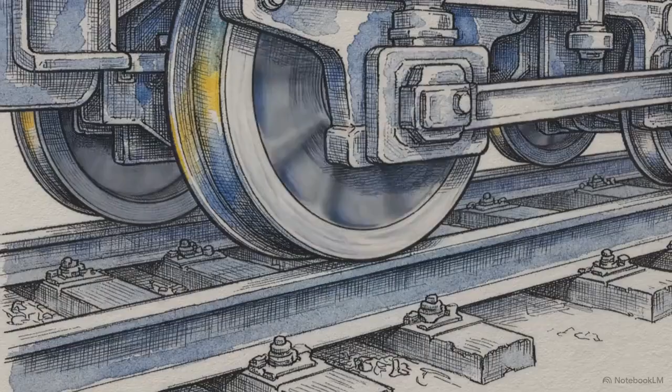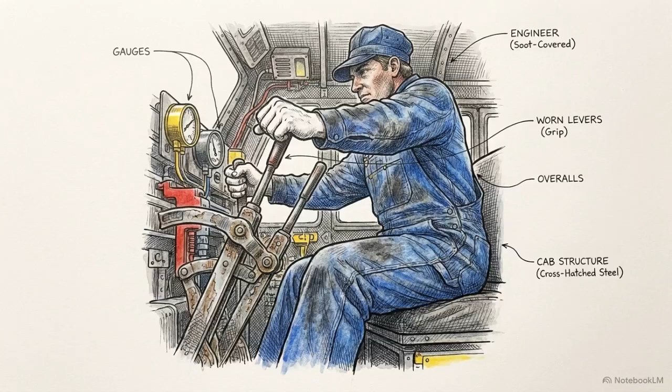Hauling a freight train weighing thousands of tons from a dead stop is a brutal exercise in physics. Under immense strain, steel wheels naturally want to break traction, spin out, and grind against the rails, wasting massive amounts of kinetic energy. For decades, engineers relied on raw weight and manual operator skill to manage this struggle.

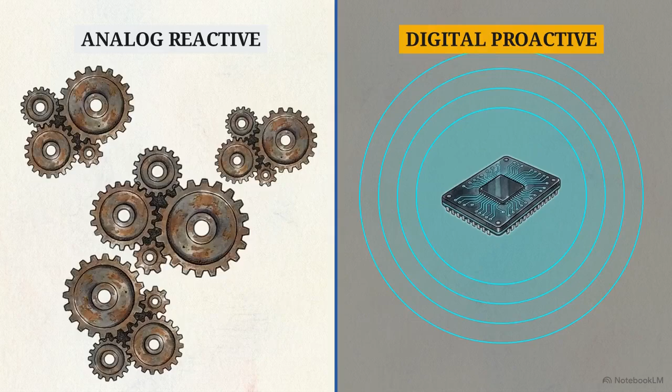Three-phase electric locomotives discard that approach entirely. They solve the physics problem of heavy hauling by replacing analog, mechanical reactions with real-time microprocessor control. We can see this exact engineering directive laid out in the official electrical locomotive manual. Under Section 2.1, Point 1 establishes the baseline for the entire machine.

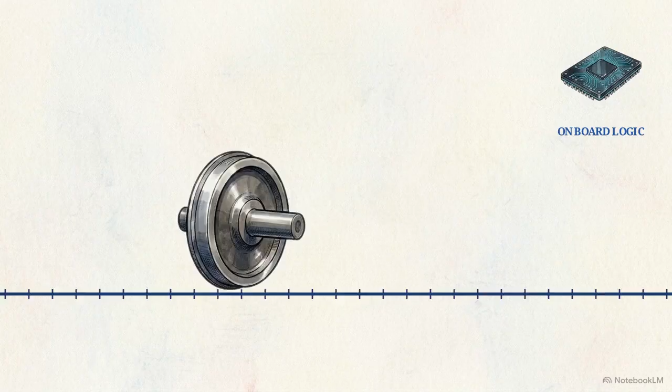Digital electronics now provide real-time traction control. In practical terms, this means the locomotive's onboard computers calculate the precise amount of grip available on the rails and adjust the power output to the wheels instantaneously. This happens entirely independent of the human pilot pushing the throttle.

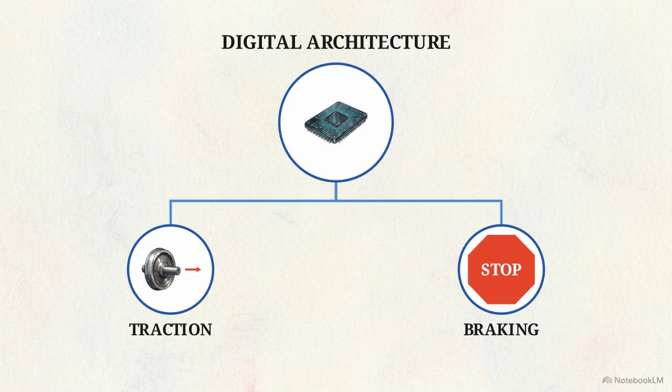This digital architecture requires three operational pillars to function: intelligent traction to generate movement, electronic braking to arrest it, and dynamic auxiliaries to keep the systems alive. Of these three, intelligent traction is the most critical. It is the primary method for ensuring that thousands of volts of electrical power actually translate into forward physical movement without failure.

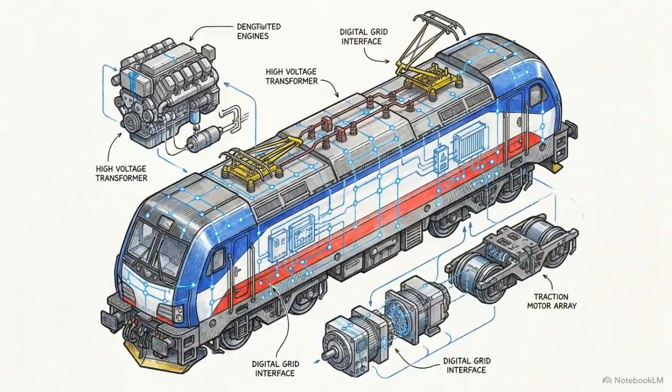A modern three-phase locomotive operates as a predictive digital platform. It manages physical forces by calculating outcomes faster than human reaction times allow.

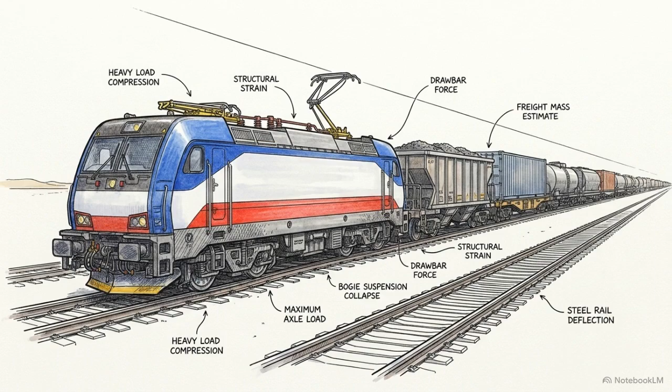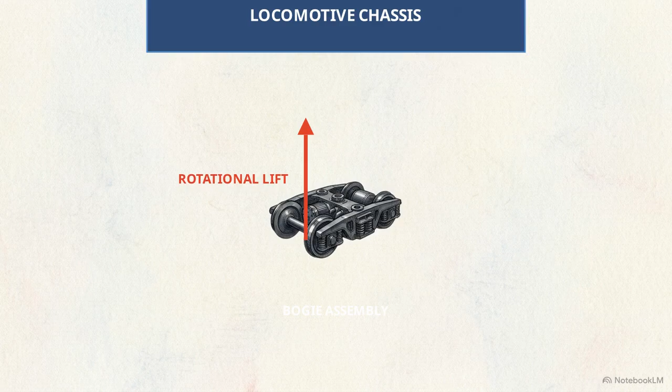To mitigate the upward rotational force, engineers install a mechanical traction bar system. This physical stabilizer anchors the bogie to the main body of the locomotive, aggressively counteracting the lift.

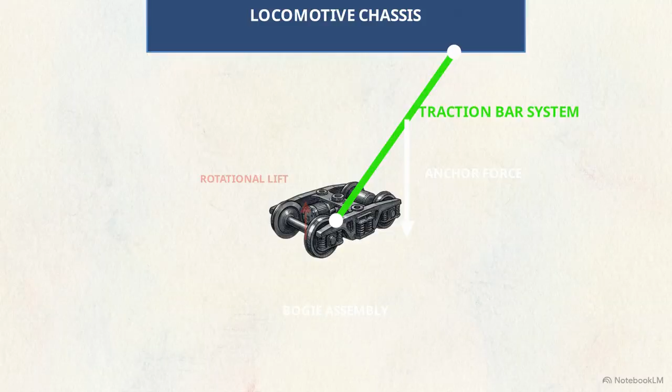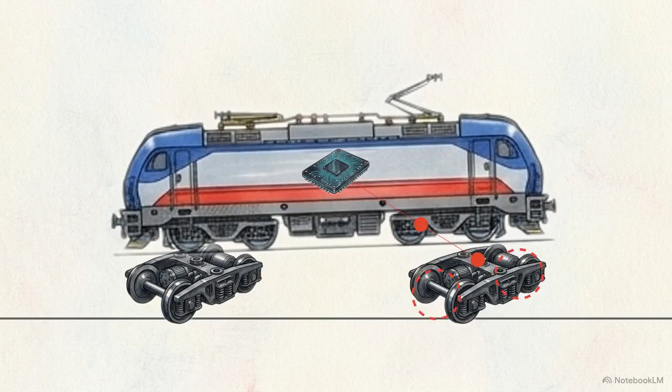Hardware alone cannot solve load shifting perfectly. The locomotive pairs that mechanical bar with an active software intervention called electrical weight transfer. As the physical weight shifts backward during acceleration, the microprocessors deliberately starve the front bogie of tractive effort. By cutting power to the exact wheels that are lifting, the software prevents them from spinning out.

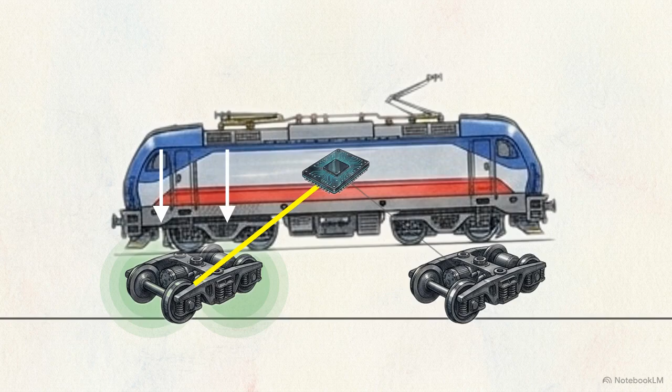Simultaneously, the system diverts that exact power into the rear bogie. Because the weight shift has driven the rear wheels harder into the track, they have naturally increased physical adhesion, allowing them to absorb the extra electrical thrust.

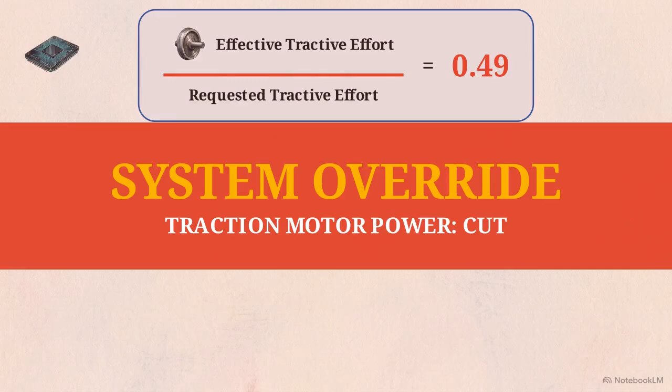Track conditions inevitably degrade due to rain or track wear. When that happens, the system relies on Point 3 of the manual, the active anti-slip protection protocol, defined by a strict 0.5 mathematical ratio. The software constantly divides the effective tractive effort, the actual grip on the rail, by the requested tractive effort dialed in by the pilot. The moment that ratio drops below 0.5, the computers instantly override the pilot to cut power, proving the wheels are spinning uselessly.

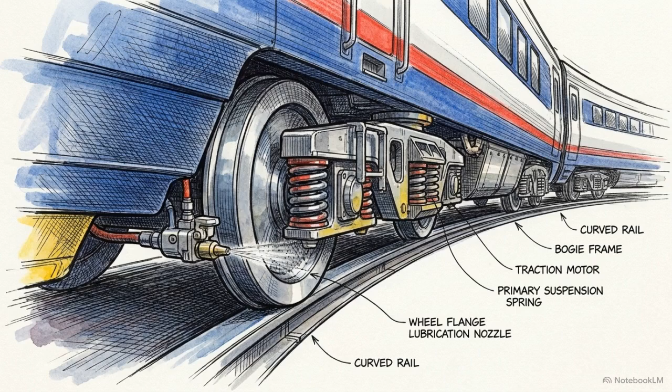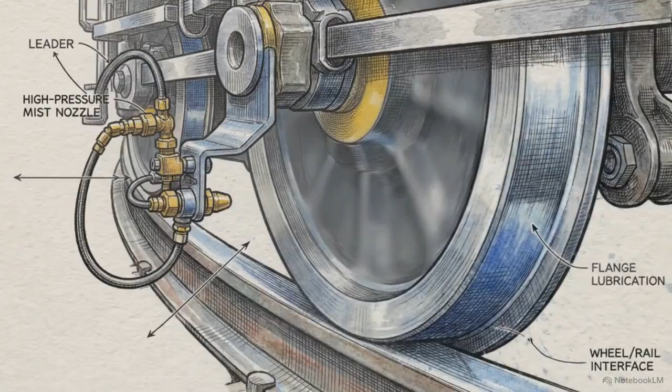Some specialized passenger units, like the WAP-5 class, integrate an automated wheel flange lubricator directly into this process to manage the physical friction of cornering. Spraying precise amounts of lubricant on the flanges reduces the brutal metal-on-metal wear. This directly extends the operational lifespan of the wheels and noticeably lowers the electrical power required to drag the train through tight curves.

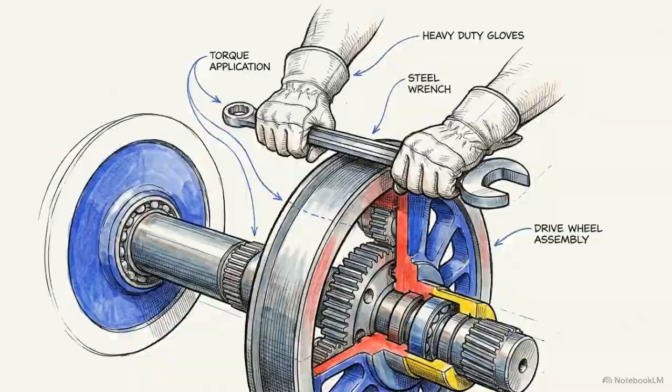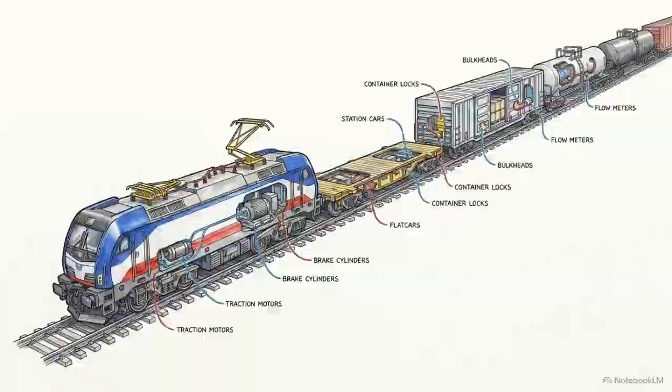Generating forward momentum requires micromanaging physical grip. By balancing mechanical anchors, intelligent weight transfer, and automated slip math, the locomotive prevents wasted grid energy and catastrophic wheel damage. Arresting the momentum of a multi-ton freight train requires the exact same level of digital precision, governed by instantaneous electronic brake systems.

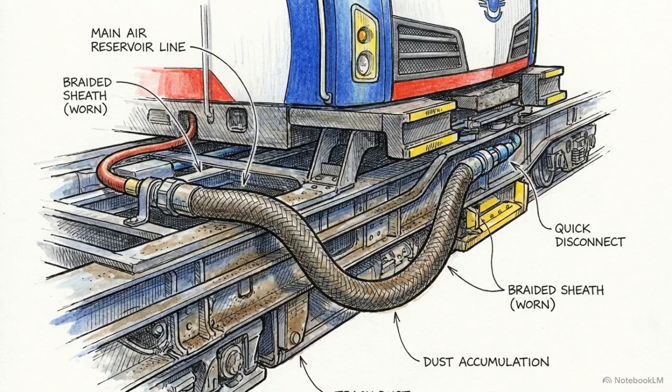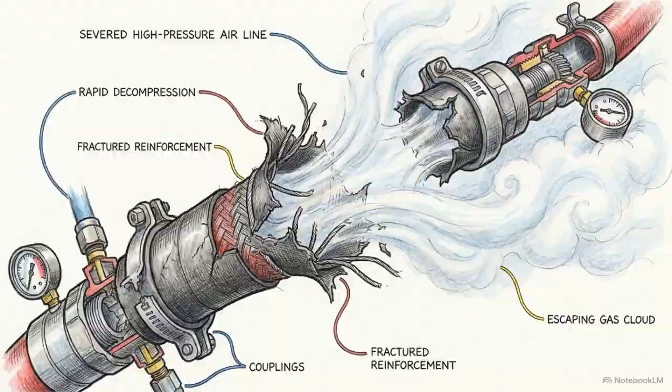Pneumatic air brakes are highly effective, but they present a massive safety paradox. How do you guarantee a moving train will stop if the high-pressure air systems entirely fail? This schematic reveals the spring-loaded parking brake architecture.

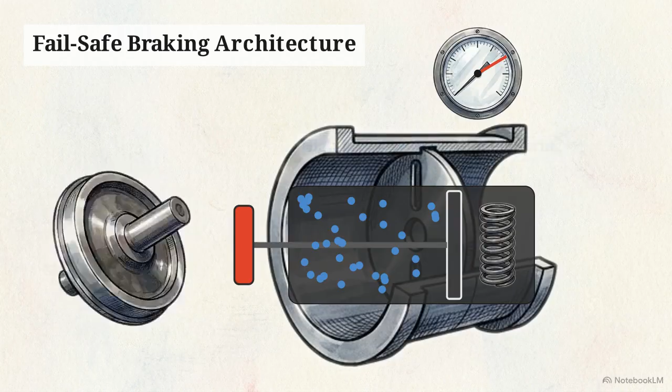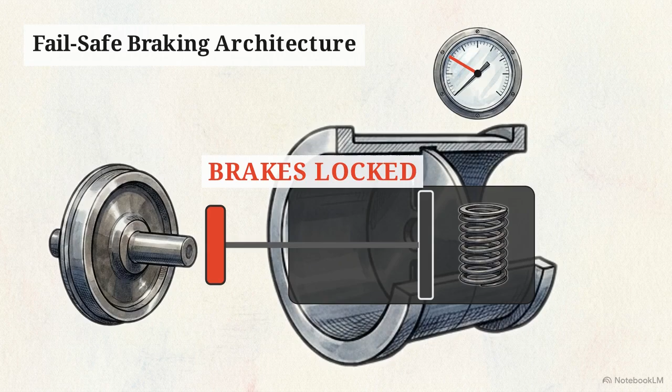High-pressure air is pumped into the cylinder, but its purpose is not to apply the brake. Instead, the air pressure is used to physically hold back a massive, highly tensioned steel spring. The system requires active pressure to move. If that pressure drops to zero, through a severed line or total locomotive failure, the air can no longer hold the spring. The coil violently expands and permanently locks the brake pads against the wheels.

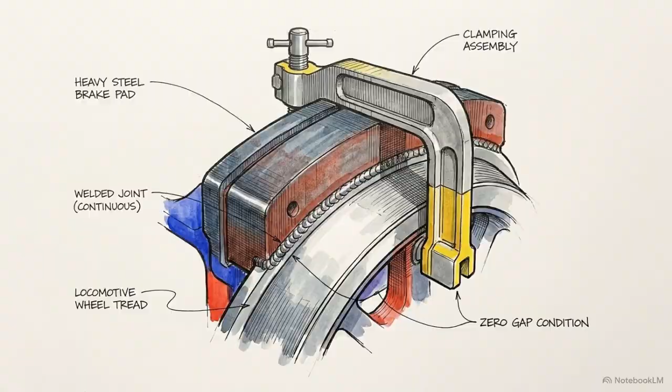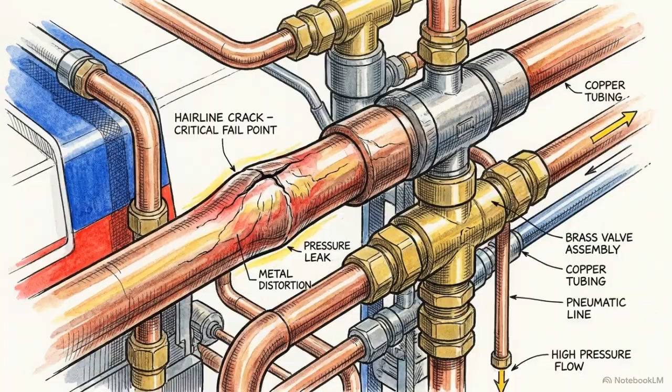Getting the train moving again after the brakes have locked requires rapidly refilling those cylinders with high-pressure air. Point 18 of the manual outlines the quick-release mechanism. To force the heavy springs back into position quickly, the pilot temporarily overcharges the main brake pipe pressure up to 5.4 kilograms per square centimeter. Sustaining that high pressure would damage the internal pneumatics, so the onboard computer times the overcharge strictly, then automatically restricts and bleeds the pressure back down to the standard 5 kilograms per square centimeter. To eliminate the complex maze of overlapping copper pipes required for these systems, engineers consolidated the pneumatic routing into a single, highly accessible three-fold pneumatic panel inside the locomotive.

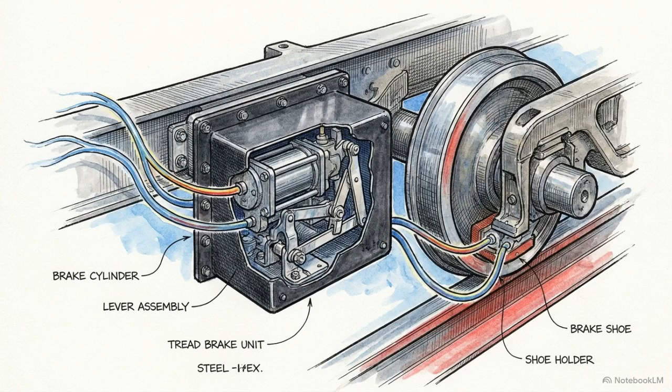The mechanical application of these pneumatics is handled by compact tread brake units. Integrating these modular TBUs drastically lowers the long-term maintenance costs of replacing worn brake shoes in the rail yard.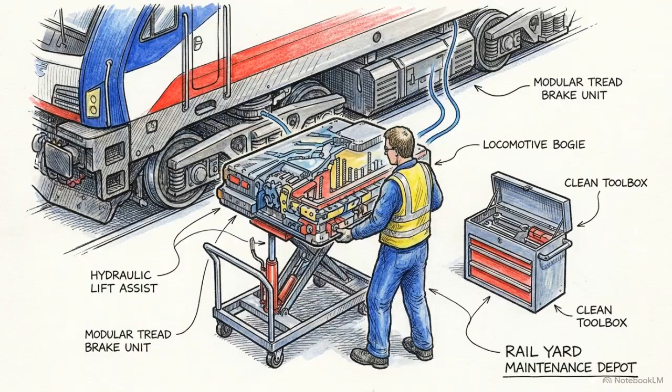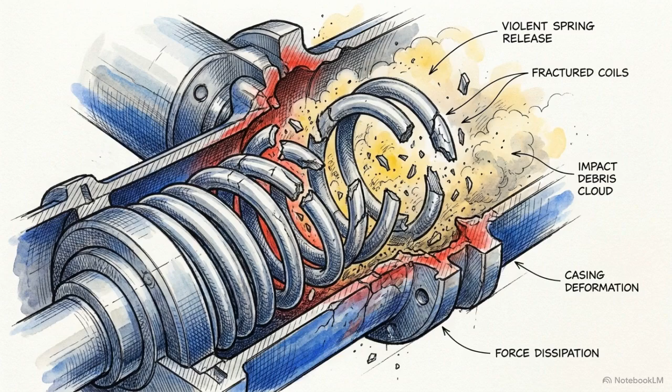Locomotive safety relies entirely on inverted physics. Engineers build systems that default to a violently clamped, fully stopped state the exact moment human input or internal pressure vanishes. Moving away from the wheels, the internal machine room houses massive cooling fans, pumps, and air compressors.

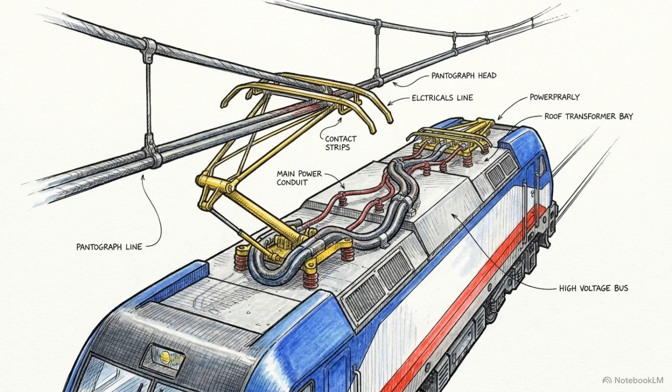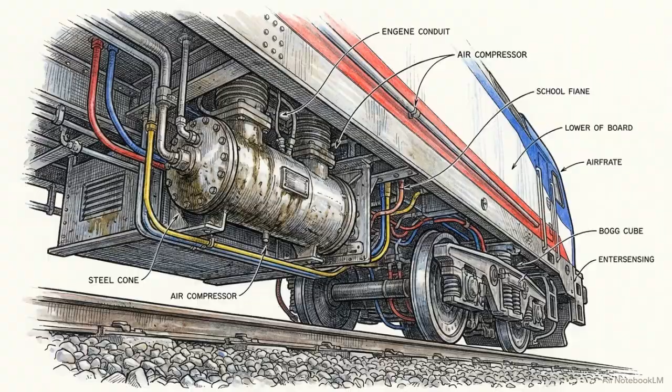Point 21 addresses a major hardware modification to protect these electrical systems, removing the main air compressor from the internal machine room and hanging it underneath the truck of the locomotive. Air compressors require heavy oil lubrication. Suspending the compressor outside the main chassis eliminates oil vapor buildup inside the machine room, removing the primary catalyst for catastrophic electrical fires.

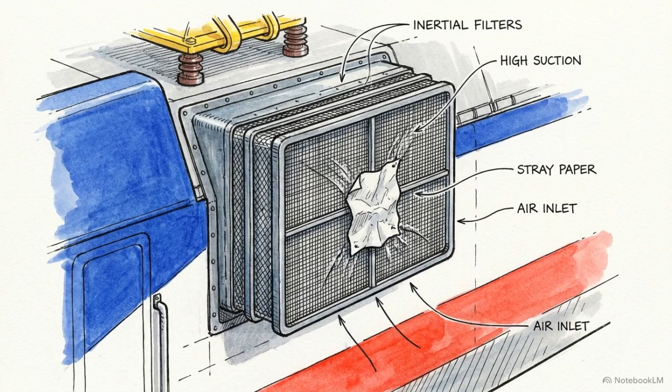The machine room itself is heavily pressurized. Intake air is forced through inertial filters, creating an overpressure environment that physically blocks highly conductive metallic brake dust from entering the room and shorting out the processors.

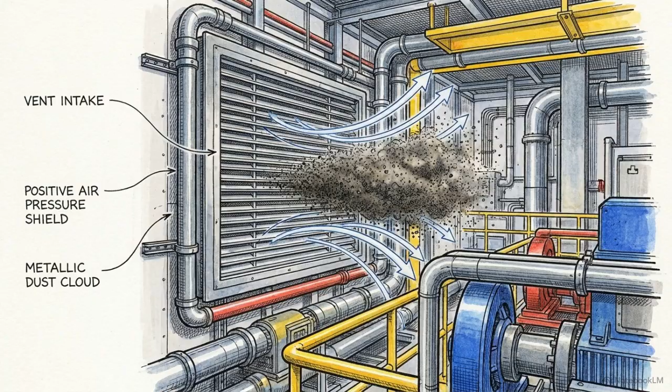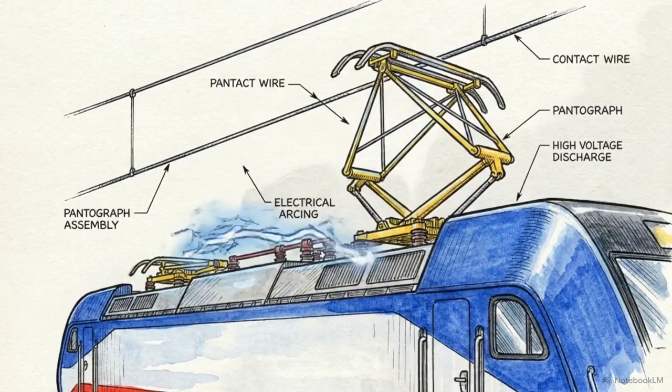Incoming electrical power presents its own dangers. High-voltage overhead lines are notoriously unstable. Harmonic filter circuits act as a shield, smoothing out sudden, destructive power surges before they can reach the delicate microprocessors.

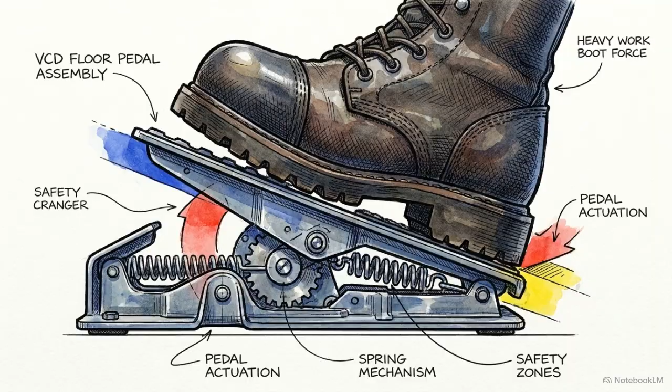The locomotive secures its hardware, and it enforces strict protocols to secure its human pilot through the Vigilance Control Device, or VCD. The VCD operates on a relentless 60-second loop. The pilot must acknowledge the system by interacting with a control pedal or button at least once every minute. If they lose focus or fall unconscious and miss the 60-second window, the computer seizes control and auto-deploys the emergency brakes.

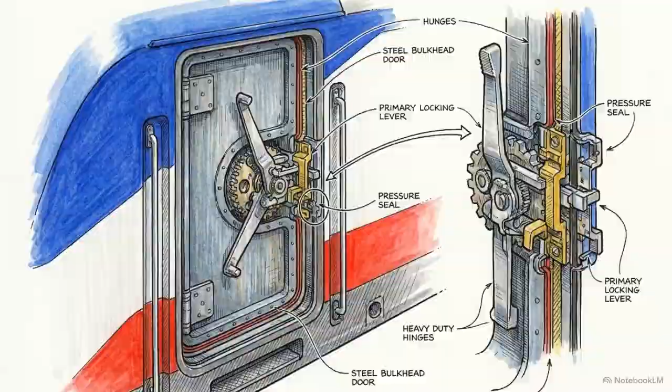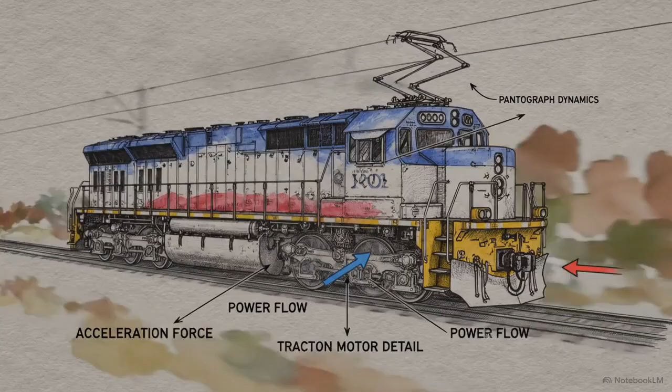Efficiency in heavy rail requires building a hermetically sealed, fire-resistant environment. The locomotive aggressively monitors the limits of its own hardware and the biological limits of its human operator. A modern three-phase locomotive in motion functions as a rolling data center, constantly processing environmental feedback to maintain thousands of tons of forward momentum safely.

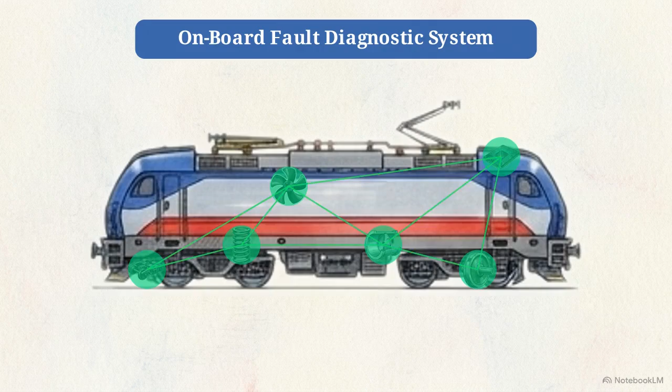The final layer of this digital architecture is the onboard fault diagnostic system, which constantly surveys the health of the entire grid. Instead of maintenance crews spending hours manually testing circuits in the yard, the onboard computers pinpoint exact component failures in real time, logging the exact node that needs replacing before the train even arrives at the depot.

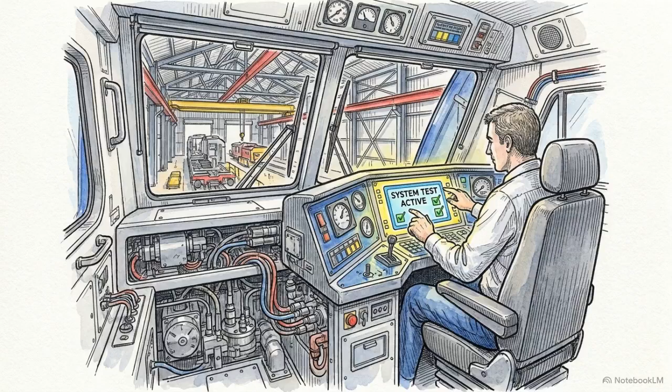Point 5 of the manual highlights the ultimate diagnostic tool, the simulated operation mode. Engineers can boot up the locomotive's complete logic and software suite to run full system tests without raising the pantograph to connect to the deadly 25 kilovolt overhead power lines.

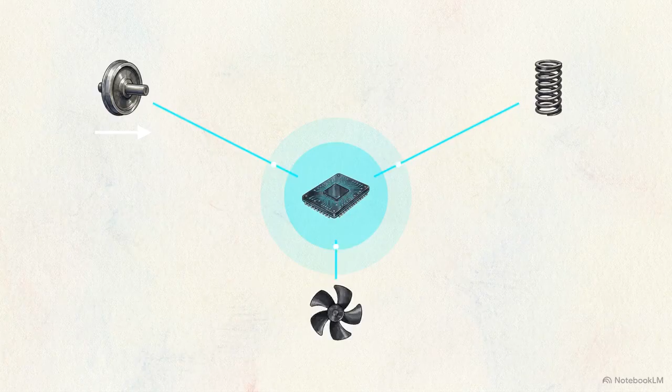Every system we've explored, from the micromanaged traction transferring weight on the rails, to the spring-loaded pneumatics clamping the brakes, to the frequency converters throttling the fans, is interlinked through shared logic circuits. In this architecture, software instructions dictate the behavior of every physical component. The three-phase locomotive's marvel is its evolution from an analog machine requiring physical driving into an autonomous ecosystem that only needs to be supervised.